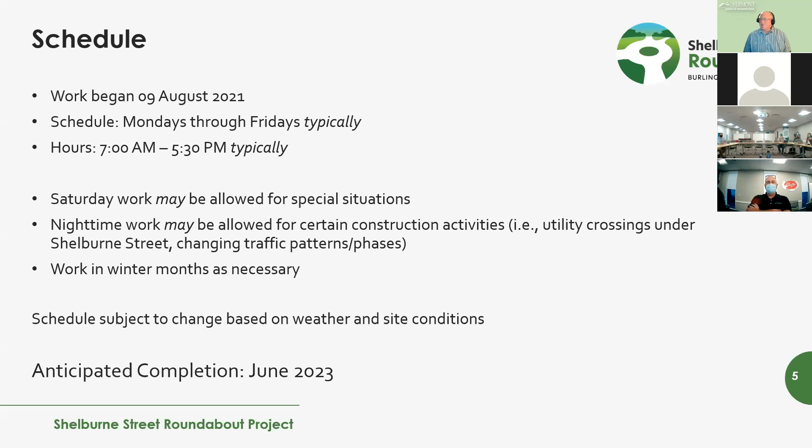So just real quick, what we've done in the first month of construction is actually quite a bit. Archaeologically speaking, we've done some excavation to assist UVM and their group of archaeologists to come on site and retrieve some historical artifacts from the project area so they're not lost or destroyed during construction.

And I believe that work is already completed in its entirety. UVM has removed those artifacts and has transported them safely to wherever they deposit those artifacts.

We also recently completed some contaminated soil and groundwater cleanup at the old Rotary Gulf site at 82 Shelburne Street, the southeast corner of the intersection. That old gas station had some tanks that leaked. We worked with the Department of Environmental Conservation, and excavated and regraded the contaminated area on that private property.

We have done some street work already. We've already removed the old rotary, the old raised island that's out there, and done some work on traffic patterns, as most folks probably are aware of. The bulk of the work so far has been utilities. We've performed some sewer, water line, and stormwater work on both Gove Court and Locust.

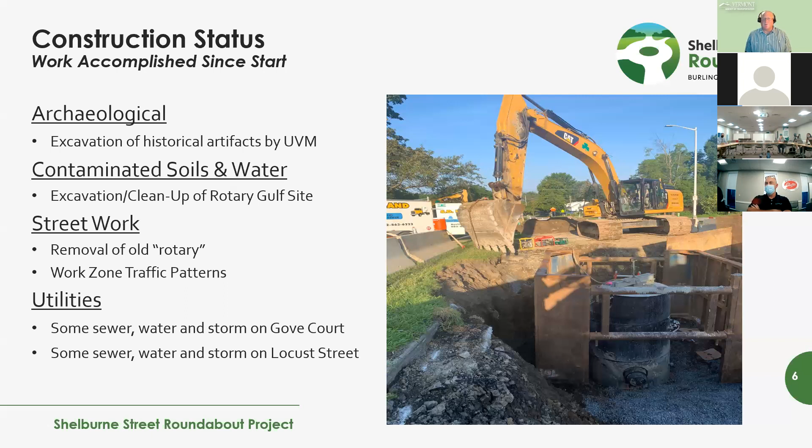And then finally, what we've found so far is that we're running into ledge as anticipated during the construction of some of that storm, water, and sewer work, which leads us to why we're meeting today. We are going to have to remove that bedrock in a lot of places. Some of it is very shallow, and a lot of it is in close proximity to houses and buildings and other buried infrastructure.

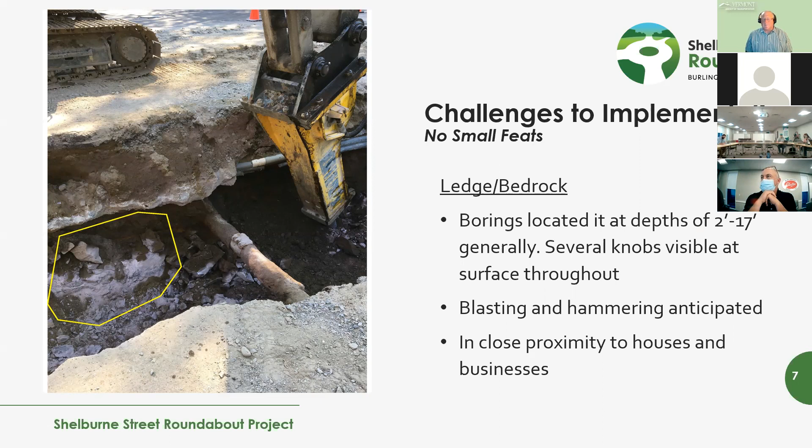So we understand that blasting could be conceived as being very disruptive and destructive, but as we're going to explain to you tonight, it doesn't necessarily have to be. We have a plan in place to remove as much bedrock as we possibly can.

And then finally, my last piece here tonight is that if you didn't join us during our July 1st public meeting, we were talking about a pre-blast survey. This map here is a little small, but essentially, if you live or work within 500 feet of the project limits, we can have the contractor come out and perform what's called a pre-blast survey, where they come and inspect your property, your foundation, your structure, to see what sort of condition it is prior to us blasting. We want to make sure that we are not negatively impacting properties and structures by our work, and this gives us a good baseline to base those sort of impacts on.

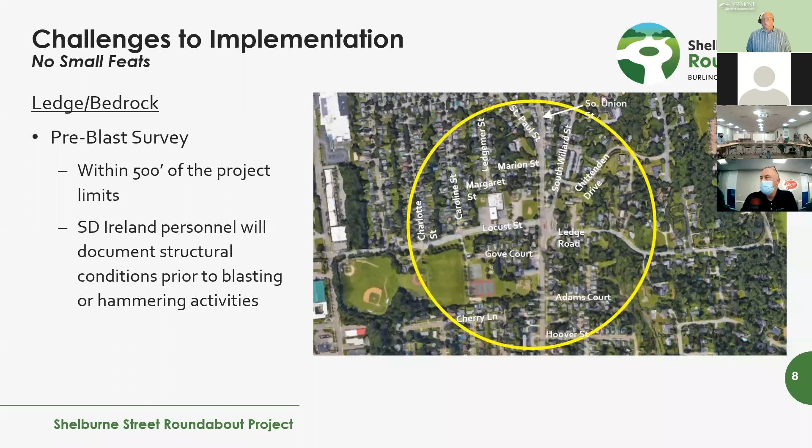And then I believe this is where I turn it over to SD Ireland, Matt Wheeler. They're going to put on a presentation getting into the specifics on the drilling and blasting. Thank you for your time again.

Thank you, Mike. My name is Matt Wheeler, I'm with SD Ireland, a project manager. You have seen us working out there diligently trying to install utilities, and like Mike said, we've run into ledge a little sooner than anticipated. So we're having this meeting now to give you folks a little overview of what we anticipate, and duration and details, and answer any questions that you may have.

I have Lonnie with Capital Rock Drilling and Blasting, and after I'm done with the presentation, a general overview for the drilling and blasting, if there are any questions that get into real details, I'll turn it over to the professional and let Lonnie answer those questions. So let's begin.

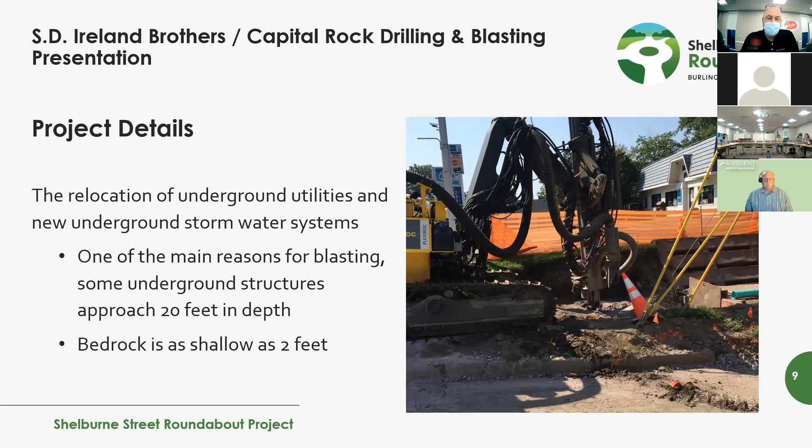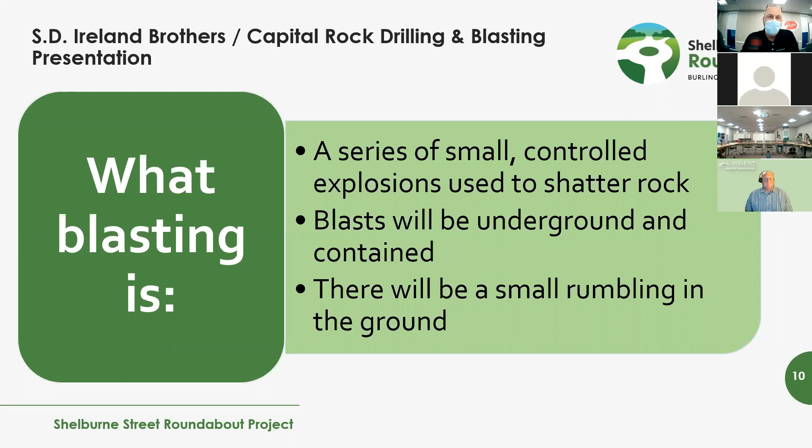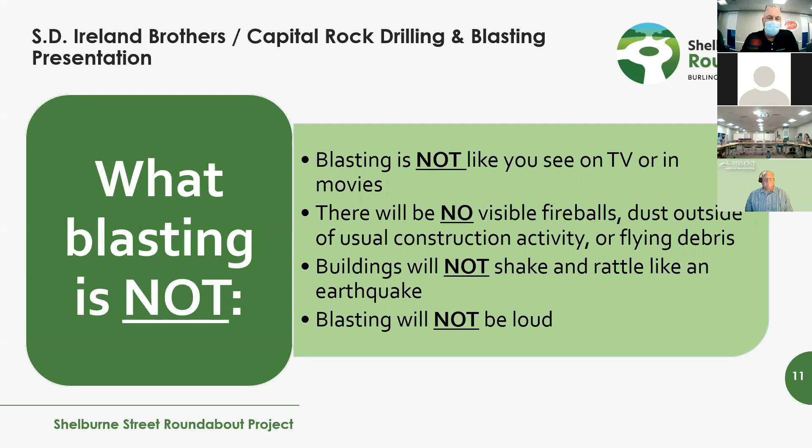What is blasting? Blasting is a series of small controlled explosions used to shatter rock. We will keep the blasts underground and contained. When the blasts go off, typically all you'll hear is a very low rumbling. Blasting is not like you see on TV or in the movies. There's no visible fireballs, no major dust other than the usual construction activity, and no flying debris. Buildings will not shake and rattle like an earthquake, and blasting will not be loud.

Where will blasting occur? During the current construction phase, we've identified ledge on the west side of Shelburne Road, Shelburne Street, from Locust Street all the way to Adams Court. During the remainder of construction, be it late fall work, winter work, and early spring, we expect to find ledge all throughout the project, mostly on Shelburne Street, some on South Willard, and some on Ledge Road. We haven't identified any major pockets of ledge on Gove Court or Locust Street currently, other than at the intersection of Shelburne Street.

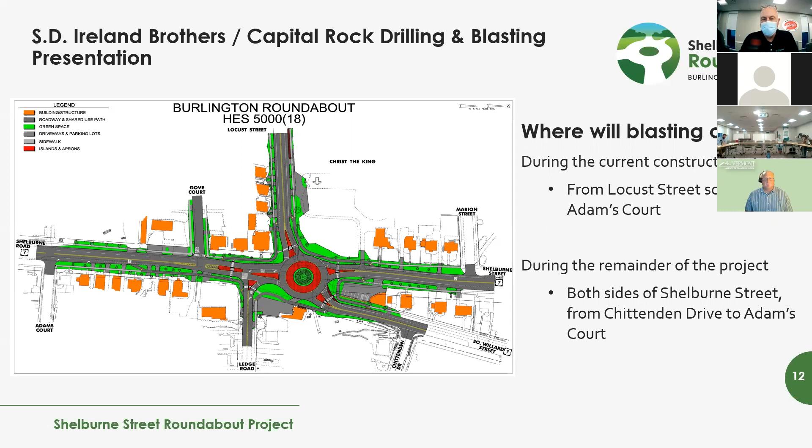There's thousands of feet of underground utilities that we need to install, and blasting will expedite this process and the project in general.

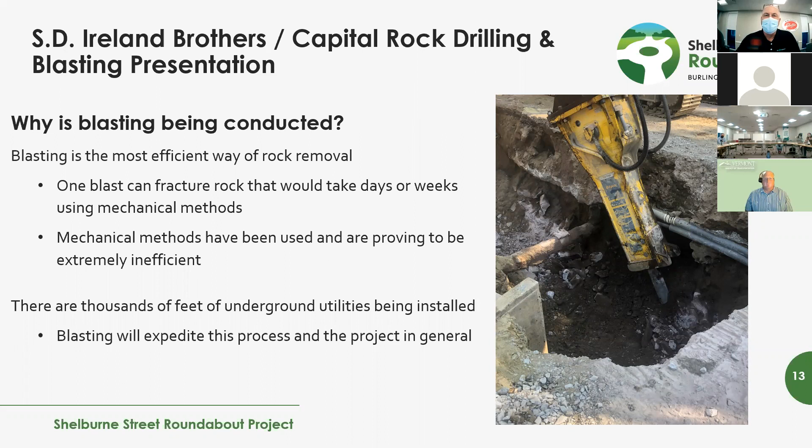How will blasting be conducted? There will be a series of small blasts. Delays are set between each blast to lessen the vibration.

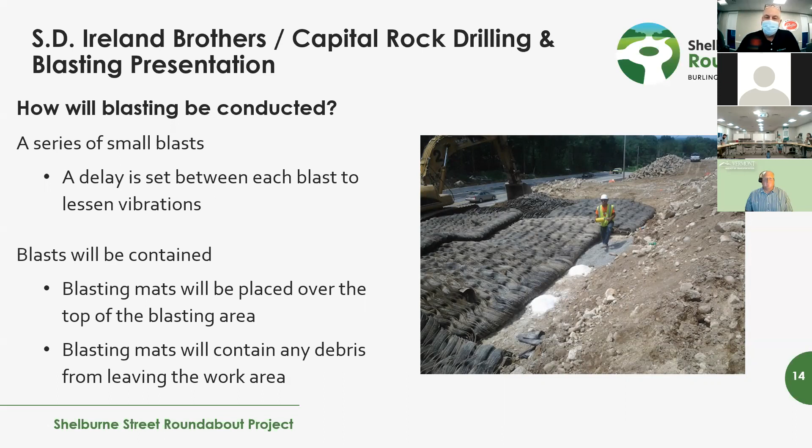Blasts will be contained with blasting mats, which are placed over the top of the blasting area, similar to what you see in the picture. Those mats are basically recycled vehicle tires that are cabled together. They're very heavy. Blasting mats contain any debris from leaving the work area.

When will blasting occur? Blasting is restricted to weekdays during non-peak vehicle traffic hours, Monday through Friday, excluding holidays, 9 a.m. to 3 p.m.

Only after proper warning and safety measures are in place will you hear audible signals before blasting. Traffic will be held clear and or detoured around the blasting zone. There will be spotters at sidewalks to stop any pedestrians. And then we will give confirmation that the area is clear and then release pedestrians and vehicles to pass through the area.

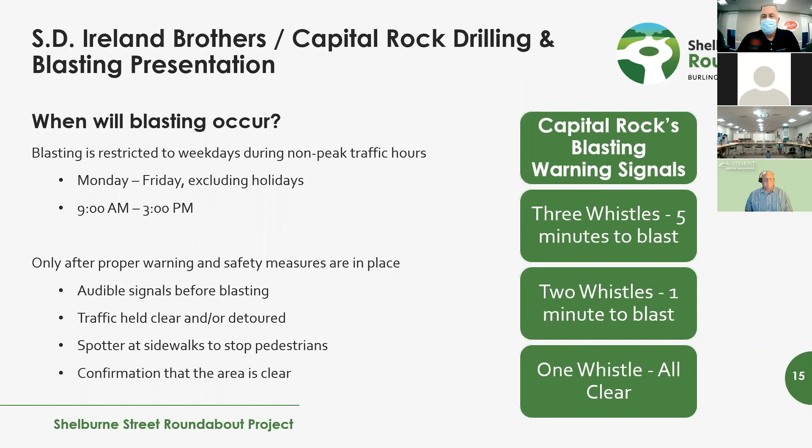Who will be doing the blasting? Capital Rock Drilling and Blasting. They're based in New Hampshire. They provide blasting service in Maine, New Hampshire, Massachusetts, and Vermont.

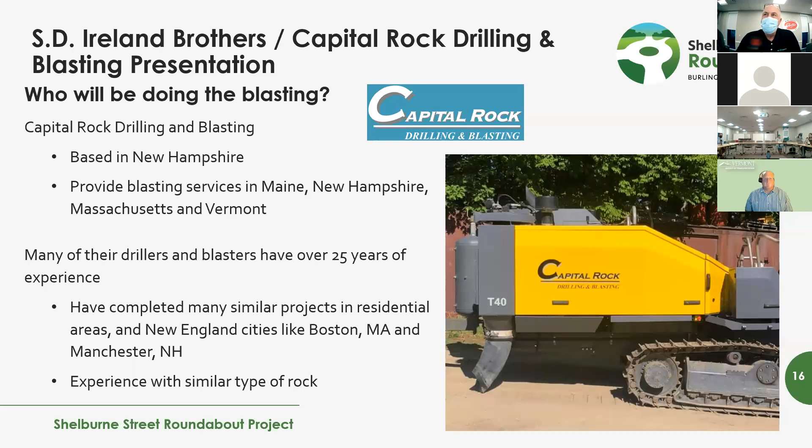Many of their drillers and blasters have over 25 years of experience and have completed many similar projects in residential areas and New England cities like Boston, Massachusetts and Manchester, New Hampshire. They're currently working on very similar projects with VTrans this year. They have experience with this type of confined blasting and this type of rock.

What can you expect during blasting? We'll be doing lots of preparation. We'll be utilizing audible signals to warn of the blasting. We will be holding traffic, vehicle and pedestrians, and or detoured. We will have many employees checking to make sure the area is clear. And the residences within the project area will be notified of the blasting schedule.

When we blast, you will hear a small rumble in the ground. The existing rock is very hard and brittle. Small delayed charges will be used, and blasting mats will contain any debris.

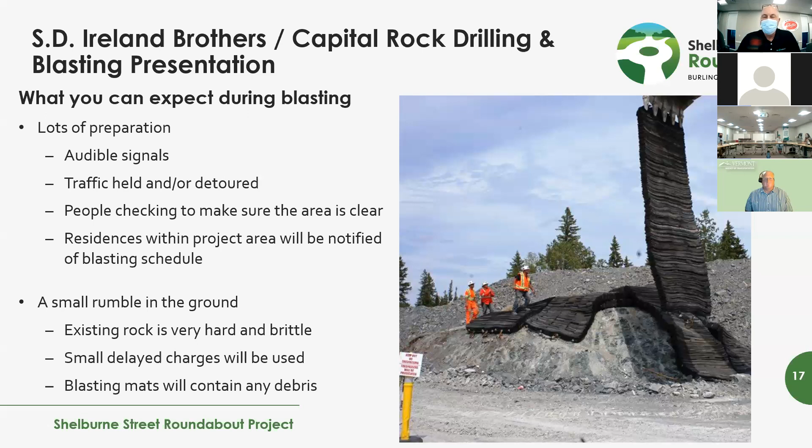What precautions are being taken? Pre-blast surveys are being conducted at adjacent properties within 500 feet of the blasting zone. Seismographs are deployed throughout the project area to ensure vibration limits are not being exceeded. We are coordinating with utility companies to be present on site to manage any necessary shutoffs. Residents will be given prior notice of any planned utility shutoff.

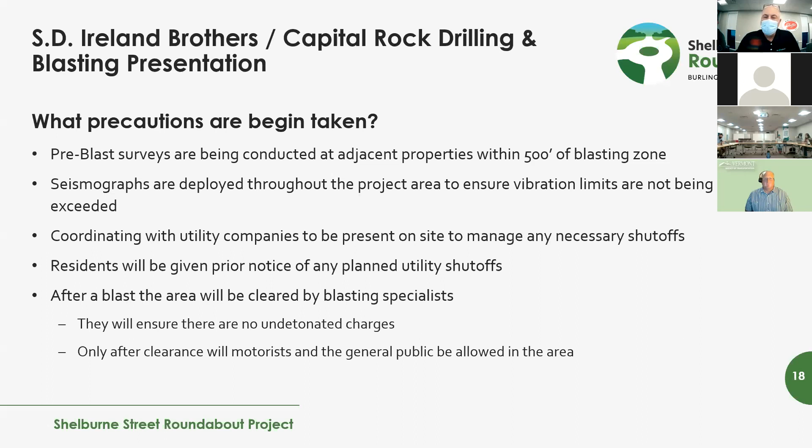After a blast, the area will be cleared by blasting specialists. They will ensure there are no undetonated charges, and only after clearance will motorists and the general public be allowed in the area.

And now we will open up to questions.